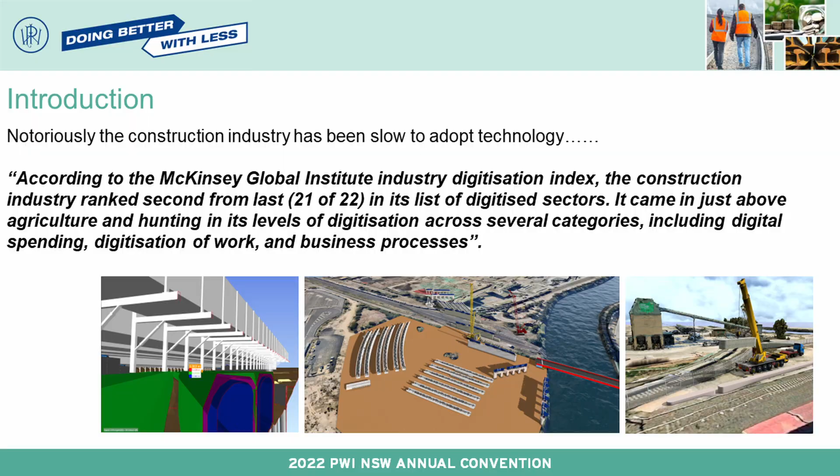Oh, it worked, great. So just to start off with, it's important to understand a little bit about where we are digitally in our projects. A lot of people might be familiar with models and BIM and all those sorts of things. Others might not. I think it's fair to say that the construction industry as a whole has been lagging behind in terms of its digitalization. We rank only just slightly higher than hunting and agriculture, which is fairly interesting. But that's where we were, and it's not to say that we are still there. Definitely not by a long shot.

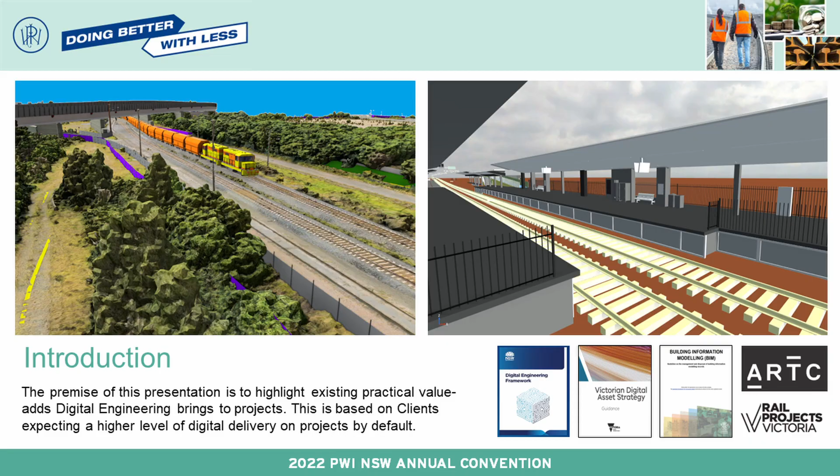We're making strides every day to get better, and what's really important to note is that that change is being driven by our clients, who we're delivering for. We have the likes of ARTC, RPV, Transport for New South Wales. They all have a digital future in mind, and a lot of the conversation is now not so much about can or should we have BIM on our project. That's gone out the window. It's really now the default expectation that our projects will be digitally enabled.

They will have 3D models, and those models will be data-rich models too, not necessarily just geometry that is nice to look at. Now, that's a really good core to work with, and that's where we are now, where we've got a huge amount of opportunity in the industry because we have that information appearing on projects as a default. So what are we going to do with it? Well, lots of things.

As a whole, to start off with, there's the more core benefits that having that 3D design in front of you enables. That's things like coordination in the traditional sense, which we'll cover, which is permanent state elements intersecting with elements, understanding how they are meant to interact with each other, but also pushing that even further and looking at not just what the permanent state is, but how we get to that.

And that's things like temporary works, bringing that out of the 2D into the 3D environment, understanding the actual methodology of construction and what those implications are in terms of laydowns, plant movement, people separation. All those sorts of things come into play, and they can really change the outcome of how we get to where we need to. And that also encompasses things like safety in design as well, so we'll cover a little bit of that too.

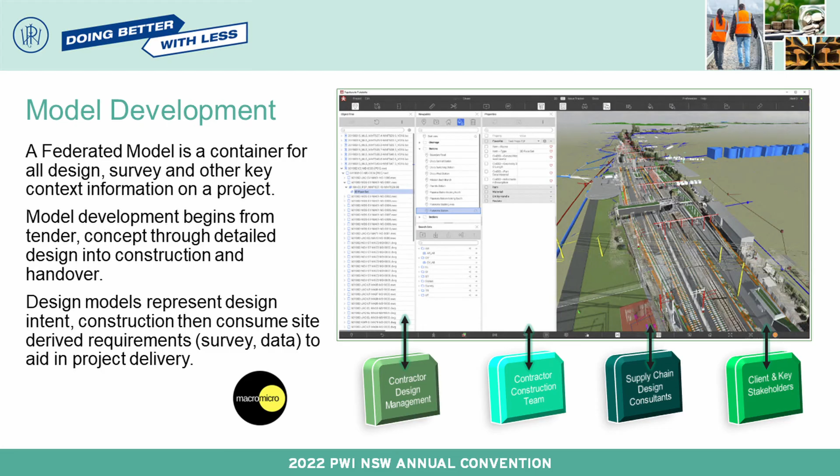So probably one of the most common ways that you'll ever interact with a model is through a federated model. We have these on all of our projects. We use tools that are called issue management tools. Probably one of the most industry-wide uses of that is Revizto. That's a cloud-based platform.

So what it means is that we're able to bring all of these various 3D models that are produced by our designers, our subbies, and ourselves together, so that we can actually understand the wider context of the project as a whole, rather than looking at discipline-specific siloed pieces of information. So we'll use a federated model for that, and that environment is one where we bring all of the various stakeholders together. So you've got us as design management, construction teams, we have the supply chain, and we have our client and key stakeholders involved in that process too.

And they're all looking and communicating with one another, using the model as a vehicle or as the base of that conversation, so that it's much easier to understand what we're actually talking about.

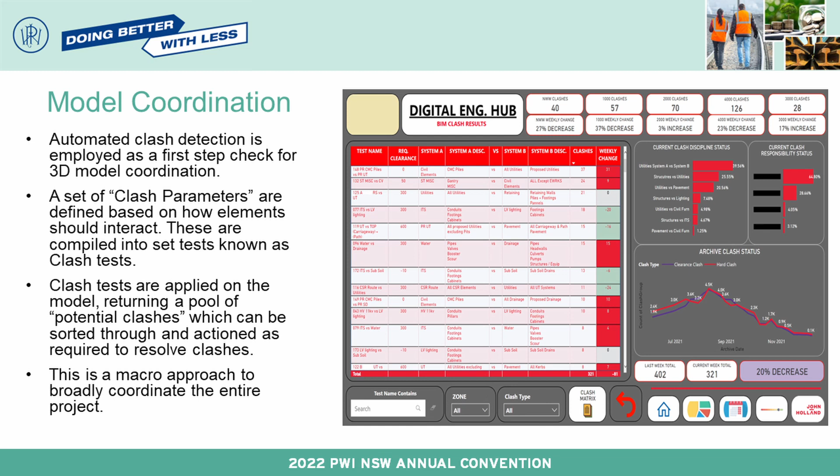So coordination comes in a lot of places. I'll touch on this quickly because it's not terribly interesting. It's just graphs.

But coordination at its base, we have things like clash detection, and where we add value there is that we as the digital engineering team sit with design management, we sit with construction teams, and we say, okay, so we know the high-level premise of this thing shouldn't touch that thing, but what actually are the specific considerations that you need to make on this project in specific areas, timing, all those sorts of things,

and we can factor that into what we're doing to build a really robust set of parameters that we can apply to the model and ask it questions, and it will return to us those automated responses, and from that we can work through to improve the permanent design. So this is really talking in context of the design development piece, I suppose.

And what that actually looks like, as I mentioned, we have Revizto, so we're able to raise issues that are actually geolocated within the model, and it gives our users the ability to then talk across the model, send messages, sketches, all those sorts of things. So right there, we're improving communication and bringing this layer of transparency into the design development that isn't really achievable when you're just looking at a 2D plan.

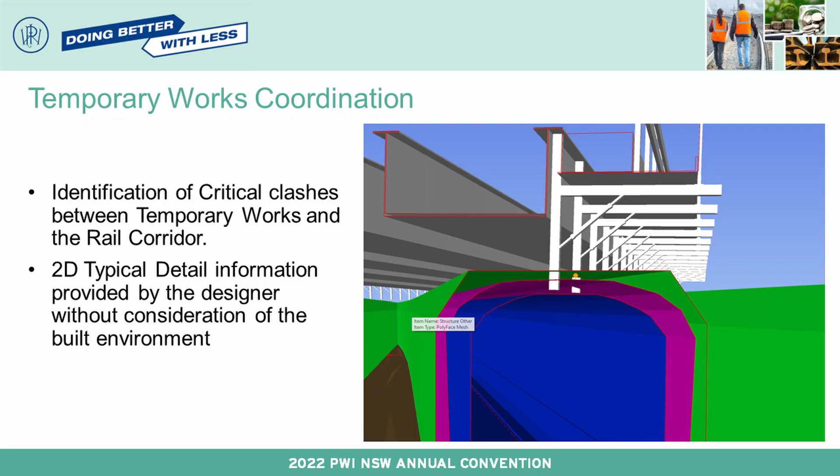There we go. Now the other piece that I mentioned is temporary works. Now temporary works, traditionally you see it only really in a 2D sense, and the amount of times that's caused problems on site for things that you couldn't really account for when you're looking at a flat sheet of paper. Just last week I had, oh goodness, lots of fires to put out. But so that's where we get involved.

Now, there is the sense that we really want to be looking for those subcontractors and designers that are able to provide us that information in 3D and getting better about how we scope them and factor that into our budgets and whatnot. But when that doesn't happen, obviously the DE team is available and has the capability to step in and fill that gap. We don't like to do it, but we can do it.

So in the case here, you can see we had a bridge that had these temporary supports that needed to be attached to it, prior to the decks going on and whatnot. Nobody thought about the implications of it having a 1.2 metre overhang below the bridge, and what that meant for the kinematic envelope until a few days before they had to go up.

So, bringing digital engineering into that, we were able to see that there was an issue and head it off at the pass before it became a problem, and they couldn't reopen the line or had to take it down or something of that nature. Easy wins there.

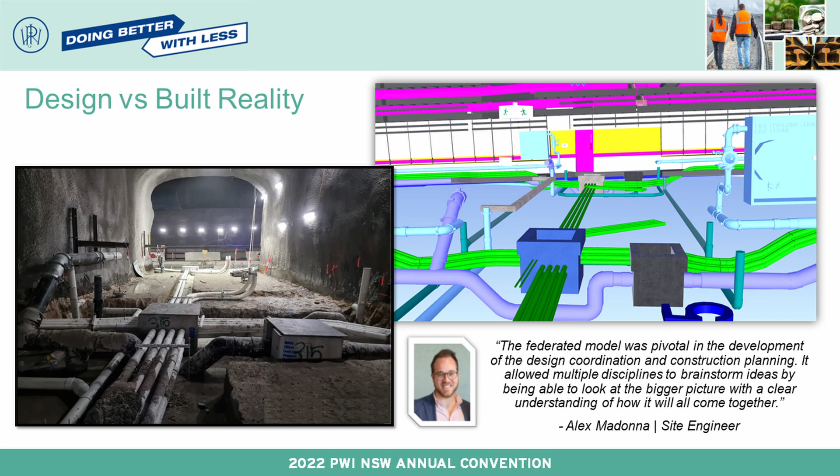So you can see on the right, you've got the actual design model of these utilities in the ground, and then to the left you've got the built reality. So that's not survey, that's what we said we were going to do, and it worked out in the real world because we put so much effort into making sure that we'd considered as much as we could at the design phase.

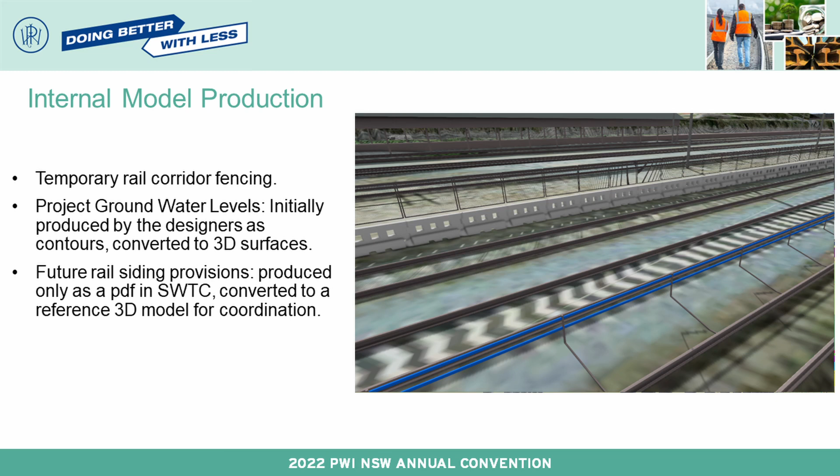Carrying on. So another way that we can add value to a project, again, is through introducing more context information and sort of lengthening the conversation rather than just looking at that permanent design. So a few ways that that happened, you can see on screen here. In this project, we had a scope requirement to have consideration for a future siding that was going to be built in the future, and we obviously had a large grouping of utilities that had to run through that area.

Now, conveniently, the scope only really had a screenshot of a drawing with 3 coordinates on it that we had to then demonstrate our consideration of to the client. And one really easy way to do that is bring that into the model. So we were able to take that string, apply some geometry to it, and demonstrate, yes, we've considered it, and this is what it looks like.

Some other areas quickly, things like temporary fencing, which don't seem like a huge thing, but they are when it comes to signal sighting and whatnot. Again, a 2D thing only. We could bring that into the 3D model to give better understanding of the site. And another one just quickly is looking at groundwater levels. Typically you might see that in your GIS portal or something, but actually bringing that into a 3D model gives more context and understanding of what's going on, but also how that model and design interacts with the real world.

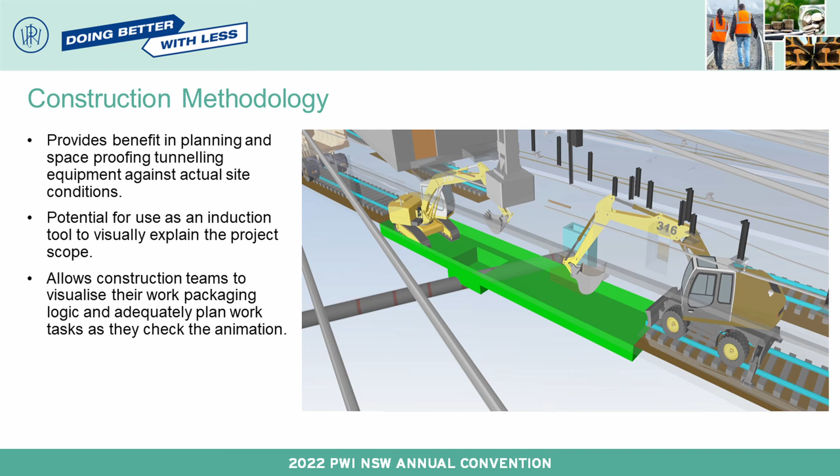And this is that second layer of coordination. It goes well beyond just looking at the permanent state, and we start actually thinking about how we're going to do something before we go out and do it in the field. And it really allows us to tease out all those little intricacies that you wouldn't really be able to detect until you're trying to do it in real life. So it gives you those benefits in the planning and space-proofing against those actual site conditions.

We also can leverage it for other things. So, that whole doing better with less, we've got this information, what more can we do with it? We can use it for site inductions and training opportunities, as well as stakeholder engagement, which I'll touch on later, but is a big thing front of mind for clients. And then it gives the construction teams the ability to visualize their work packaging logics and make adjustments accordingly to make things actually buildable. So you can see a few images here of various construction methodology.

Now that was at a macro scale, so you might have seen these before, looking from 10,000 feet down at a model appearing out of the ground. Now we can go to a more granular level of detail, and again, we're just using what we already had. In this sense, we end up getting quite heavily involved in things like activity method statements. We're actually able to go into that micro level and understand things like the slewing of a crane, or how a girder in this case is being lifted over a rail corridor, and flesh out and give life to a method statement and make the client more comfortable with what we're proposing to do.

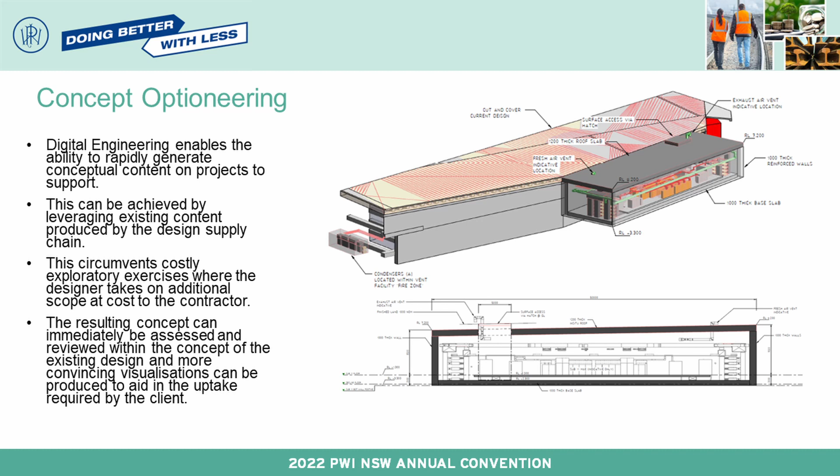Quickly as well, concept optioneering. So again, the DE team brings a capability to produce content as much as it does interact with content produced by others. In this case, we like to inject ourselves into that optioneering space too, and be a conduit to explore options through the design phase, and provide value in that sense. A little substation there.

And the big one is stakeholder engagement, I think. Now, our clients are becoming very mature digitally, and stakeholder engagement is a big part of what a lot of them are mandating as part of that delivery phase. What you're looking at here is an example, again, from Gateway, which is one where we conducted our signal sighting for the corridor virtually, completely within the model.

Again, using our permanent design models that we already had and some reality capture of the site, so photogrammetry. We could overlay the two. That included things like bringing in that temporary fencing that we did earlier as well, building up an actual vision of the world, and then conducting our signal sighting, and we got that through, which was a first in Australia. So we were happy about it, I suppose.

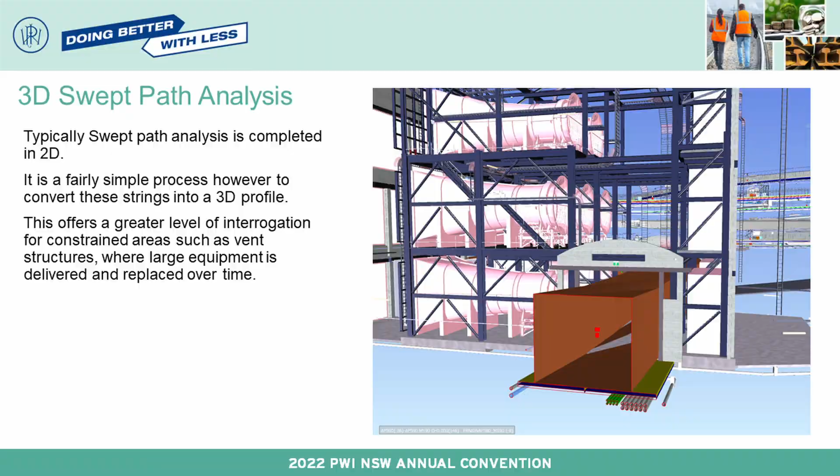So that got picked up fairly quickly through that process of actually visualizing it, because in 2D it was obviously wide enough and was able to run the path, but it wasn't until we thought, oh well, let's just check it, that we discovered the issue.

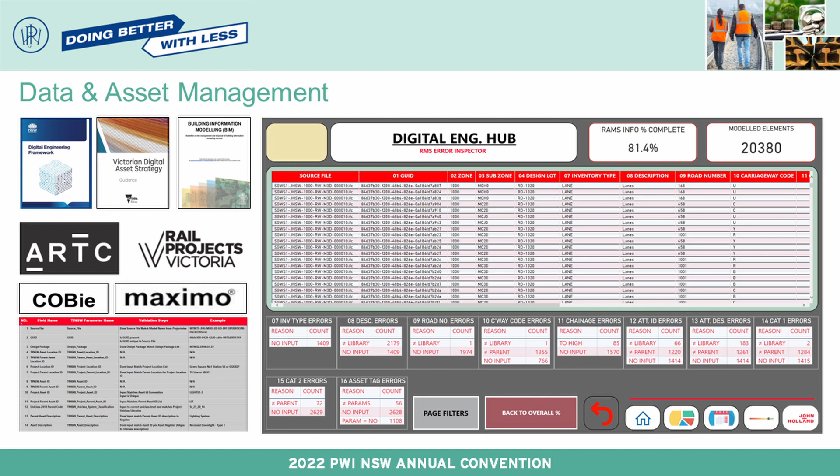Now I apologize, it's data, it's boring, I know, but data is that other not quite as understood area of digital engineering, and there is a lot of benefit that can bring to a project too. So as I mentioned, we will take those data requirements that end up becoming clients' asset information models and populating their asset systems, we're able to extract that from models, validate it as the design is progressing. So we're able to give really clear, consistent feedback to our supply chain on all of those areas that they need to pump into those models.

But what's really cool about that too is that we can take that information and we can extract analytics from it around earned value, or just how the design is progressing, all of those sorts of things, just by nature of it existing.

When I talk about model validation too, we will validate that information on behalf of our supply chain and give them really clear feedback on where there's potential gaps or inaccuracies in that data set, and we're able to send that, work with them, have them in the same reporting environment, so that they're able to make changes quickly and effectively, rather than it being an afterthought that we get lumped with at the end, figuring out how to actually build an asset system out of half-baked information. Yeah, it's great in that sense too.